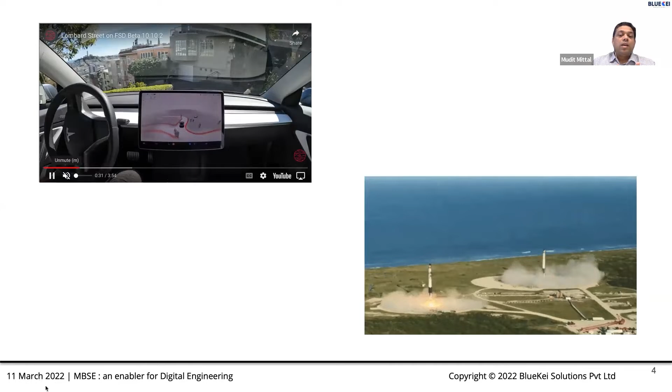So one thing we can simply understand from all of this is how software is becoming a very, very important part of the digital engineering aspect, in the overall product development aspect. This is not just about building software, but also using software to build our products. So it's both of those aspects we are looking at.

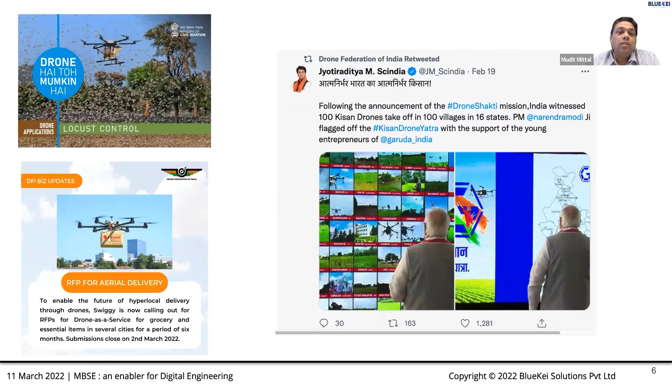Another example is drones, and you might have come across how the government is now supporting drones. The image on the right shows the latest news wherein the Drone Shakti mission has been launched. There are a lot of new technologies and laws enabling small players to become big. The drone industry especially has been driven through startups, coming up with different kinds of applications - agricultural applications, drone-based delivery applications, from small packages to huge consignments across cities. All of this is happening through different engineering aspects.

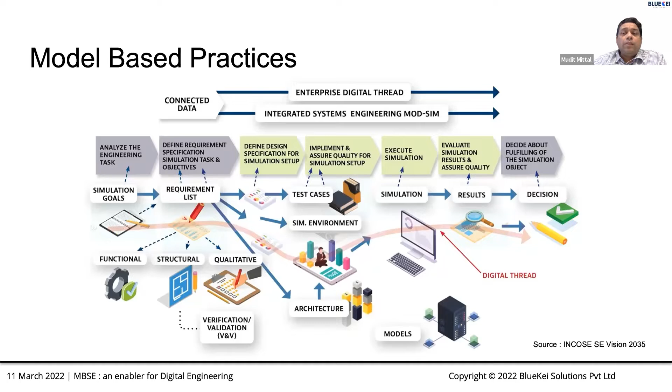This together is enabling your digital thread. And another important aspect to look at is that these models and virtual simulations are helping us achieve two or three primary objectives of any manufacturing organization, which is to reduce time to market.

Also, first time right - what this means is if you are able to validate it thousands of times in the virtual world and fail there fast, but in real life you are actually able to produce it right the first time, you have reduced your overall life cycle, shortened your duration of time to market, saved a lot of cost on errors, and you are ahead of the game with the competition. And that is what is enabling the use of model-based engineering.

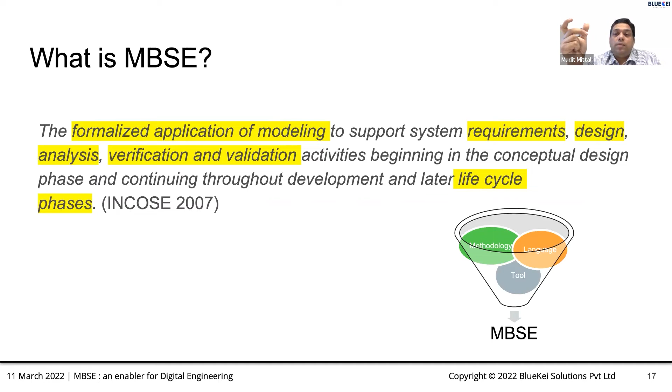One of the core languages, which is very common and has now become a standard, is the SysML language. SysML stands for Systems Modeling Language, and ultimately a language is providing you semantics and notations.

So the idea behind a graphical language is that you are able to denote your concepts of system engineering, your artifacts, such as context diagrams, behavioral models, architecture, requirements, test cases, or parametric analysis, in terms of diagrams which anyone can understand, because they're all using the same common language and notations at the back end. This will help anyone in the world understand, irrespective of which tool you are using. So in a way, SysML becomes tool and methodology agnostic.

Now, the methodology piece is often driven through the organization's culture and their product development process, but also sometimes adopted from the best practices across the industry. So one of the most common ways of looking at methodology is approaching it from a black box and white box perspective.

Wherein you drill down to the problem space, understand what is the mission you're trying to achieve, and then you go down into the solution space. All of this problem space and solution space can be broadly categorized into 4 pillars, which is also the 4 pillars of SysML. You can represent the system engineering artifacts in the form of structure.

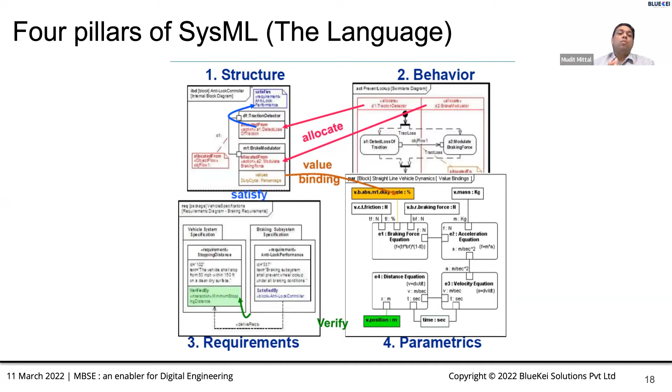And then you have requirements and parametrics. All this together is stitched together and forms a traceability end to end, right from the left side of the V to the right side of the V.

This will actually help you not only in early verification and validation, but also in your certification, because many safety certifications look at the completion or complete coverage of requirements. So at the same time, you're also satisfying all your certification needs.

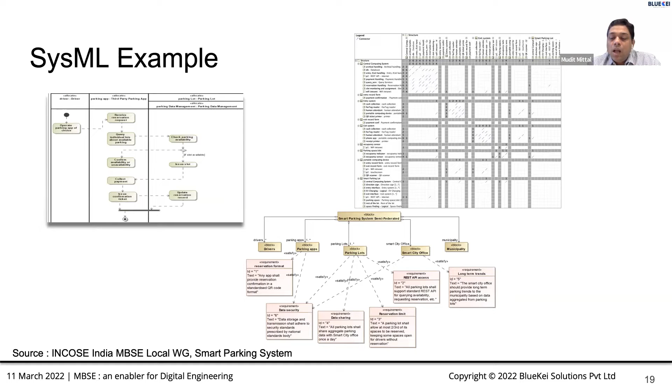If you look at overall, just trying to conclude on the digital engineering aspect, a system engineer actually has to partner with machines. When we talk about machines, we are talking about the enablers of product engineering. For example, your computers, but it is now not only limited to computers, but you're also interacting with test setups, prototypes, immersive visualization. So a lot of new technologies are coming into the game.

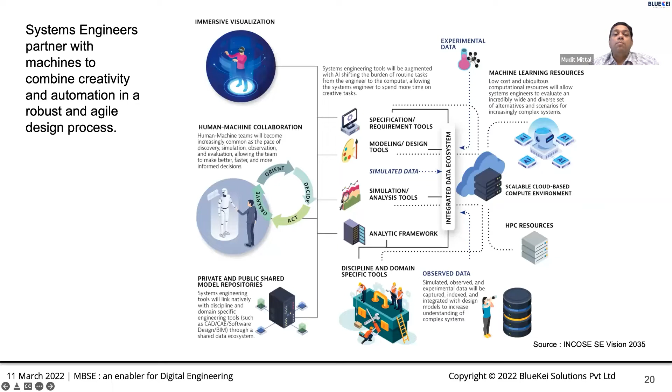You're also looking at machine learning and AI enabling systems engineering. So there's a concept of SE for AI and AI for SE. All of this is coming together. And at the heart, you actually have models and simulations. That is what your MBSE is. And this is how MBSE is tying the world together of digital engineering.

If I quickly summarize what are some advantages of MBSE adoption, one of the biggest use cases for MBSE adoption would be reuse. Once you have done it once, you can easily reuse your models, you can easily reuse your library components for the next project or for your next product cycle.

It reduces errors because in the traditional way, and we have seen many pain points of our customers, they are doing maybe architecture in one tool and design in another tool, and those tools are right now not talking to each other. But slowly, the adoption of MBSE is actually enabling this interoperability, wherein you can take data from one tool and move it to the other tool, and you're able to reduce those errors because all of this is happening automatically, and it's no longer dependent upon just a human brain.

It enables communication. Once you have these views created, it helps you communicate with all the stakeholders. Across the lifecycle, you're able to model from the left side of the V to the right side of the V. And since this is a computer-readable language, a computer-readable model, you can actually do automated reasoning. You can do a lot of algorithms on top of your models that can give you a lot of analytical results. And a lot of research is happening in this field.

Ultimately, what is happening is it is narrowing the risky and expensive gap between describing a design and analyzing it, because again, the tools are interconnected and your design can easily be fed into virtual validation and verification.

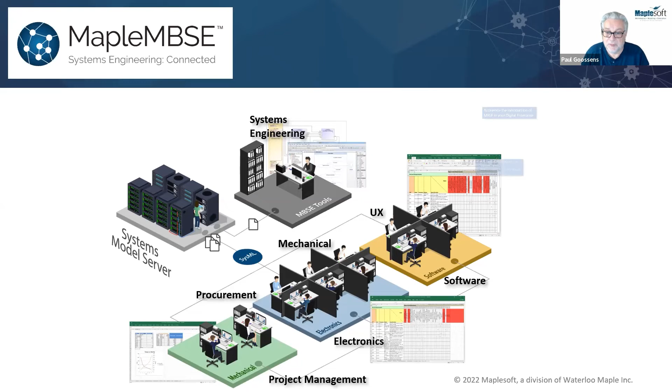Mudit talked about the SysML model, which captures the four pillars of the system definition. But the systems engineer needs information from the various subgroups involved in the design process. Typically, these people are called subject matter experts. They have the knowledge to provide the level of information required for the systems engineer to build a successful systems model. Really, what our tool provides is the ability to help get that information from all the stakeholders in a consistent way.

It also reduces resistance. There's typically resistance by various people to new tools and new processes, because all we're asking the SMEs to do is use Excel to do their work. With Excel at the front end, at the back end we're then converting the information that goes into the Excel front end into the systems model in a consistent way, structured the way the systems engineer requires it.

This isn't just about improving the workflow, the data flow between the SMEs and the systems engineers. It actually means everybody can collaborate much more effectively through the systems engineer, so they can all capture their knowledge, share it, and collaborate between all the stakeholders. So it really does help smooth out the process, and it increases knowledge and makes that knowledge readily shareable.

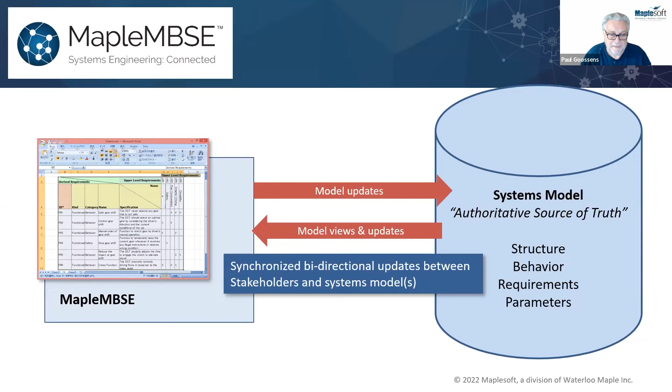So it actually bypasses any need to go through the other systems engineering tools. Everything just happens seamlessly. We're using a familiar interface to allow end users to put their knowledge into the tool. Everybody's comfortable using Excel. As one of our users said, why should we force our end users to use other tools when Excel can actually be used to do that?

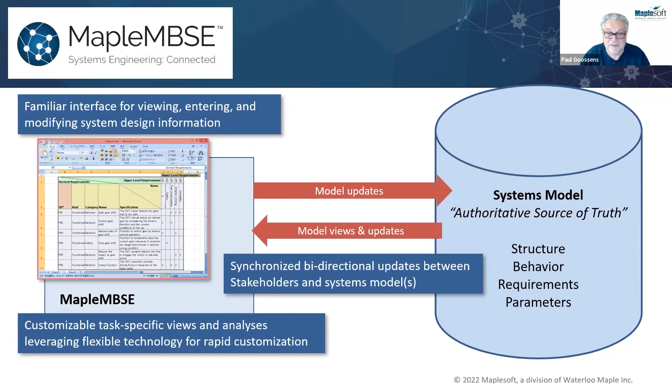Because there are many different tasks and configurations that need to be performed, we provide powerful technology for customizing the front end and back end to do that integration. It's very quick - typically it takes some of our end users between half a day and a day to configure an application using our configuration tools. Currently we integrate with models developed using some of the bigger SE platforms - IBM's Rhapsody, MagicDraw, Cameo through Teamwork Cloud, and recently last year we introduced an integration with Capella.

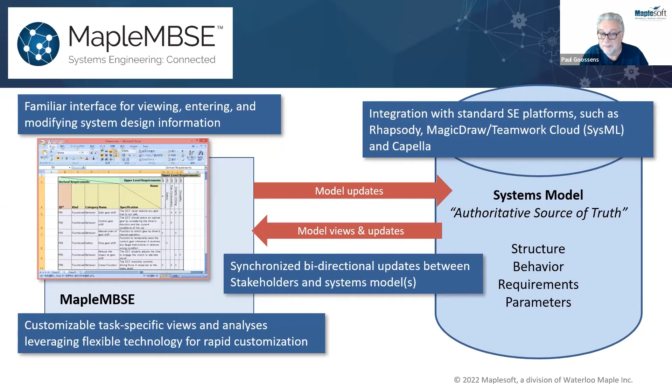Just to give you a sense of what it's good for, these are the typical use cases we get involved in. Really what it comes down to is when you have large amounts of information that needs to be collated, structured, and integrated into the systems model. There is no cultural shock for the end users, they're already in a tool they're comfortable using, so it's a very simple step for them to use our tools to do their work.

Typically this is information required at a certain level of detail that can't be acquired any other way. You need the subject matter expert to provide that level of knowledge and detail needed to create actionable tasks within the systems model. We mentioned functional decomposition as an example, and that's what we're going to show in a moment. We also have systems engineers using the tool to analyze the structure of the systems model, getting a clear tabular view of the system to perform analyses like design structure matrices and traceability analysis. So this gives you a snapshot of the kinds of applications the tool is being used for.

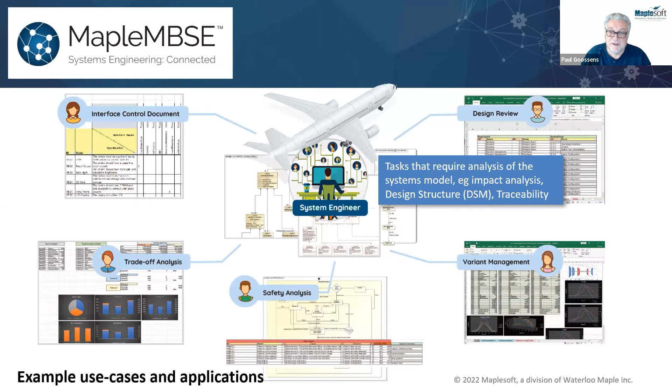So that's just to set the scene. What we're going to show you is Barani and I playing different roles. Barani is going to be the systems engineer, driving Cameo and setting up the model and the view that I will be using as the design engineer to provide detailed functional decomposition that will then be added to the systems model. So while I'm getting myself set up, Barani, if you can share your screen and take people through what we're actually going to be doing.

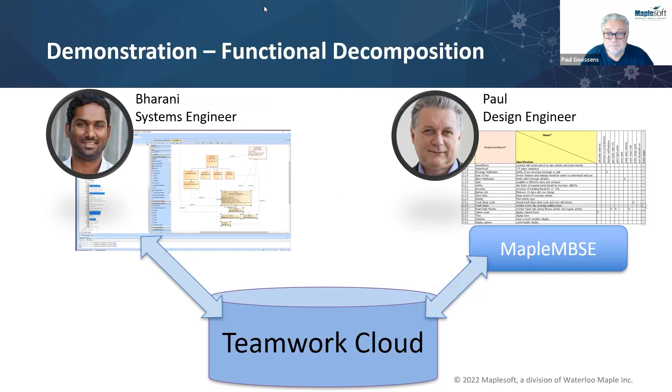Yeah, thanks, boss. Should be able to see my screen now.

So for today's use case with MBSE, we'll see an aspect of functional decomposition. Functional decomposition means you identify the functions you expect your system to do, and how the system has to perform these functions. If you remember from Mudit's V diagram, on the left side you start with some requirements, then define the high-level definition for the system, and then break it down into more detailed information about the system. For this activity, we'll see the behavioral aspect of the system.

As an example, let's consider an activity tracker. The main functions you'd expect are to identify the steps you take, measure heart rate, display notifications, connect data to your phone, and so on.

In terms of functional decomposition, what's expected from a user is to identify functions from a requirement that's already defined. This requirement could come from your technical requirement documents or system requirement document, etc. You identify the key functions, then break down or decompose the function into more lower levels, getting into more detail down to what's called a basic function. A basic function is one you can allocate directly to a certain component, or relate to certain requirements that define the function in a consistent manner.

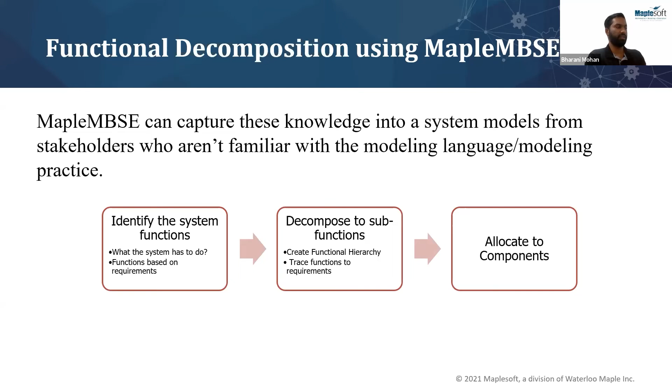So for the functional decomposition with MapleMBSE, we're going to perform the same thing but at a higher level. Paul will identify some system function, then decompose that system function into sublevels, relate it to requirements, allocate it to certain components, and so on. That will be Paul's role. Once Paul makes the changes, he saves his changes to the system model.

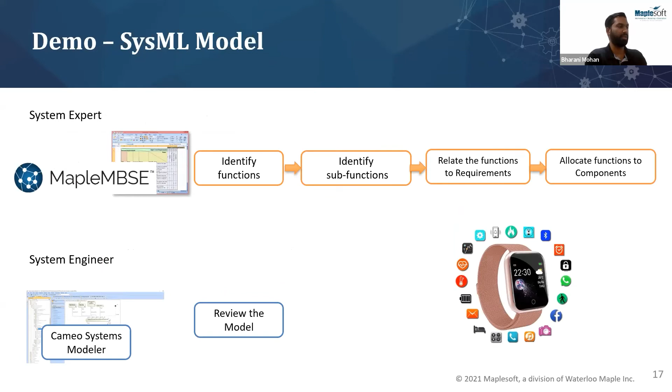I'll be opening it and we will review the model, like what are the new additions that Paul made, and how these information are captured in a structured format. So before I move to Paul, here I have the model open with a modeling tool. This is Cameo Systems Modeler. You can see that I opened the activity tracker. There are already certain functions defined in the model, relations to requirements and so on, as you can see. So I have created a template for Paul to capture his knowledge of the functions for the specific system, which is the activity tracker. He's going to identify the functions, make the relations, and then we'll get back to Cameo to see how he has added the information in a structured format and how we are able to capture it.

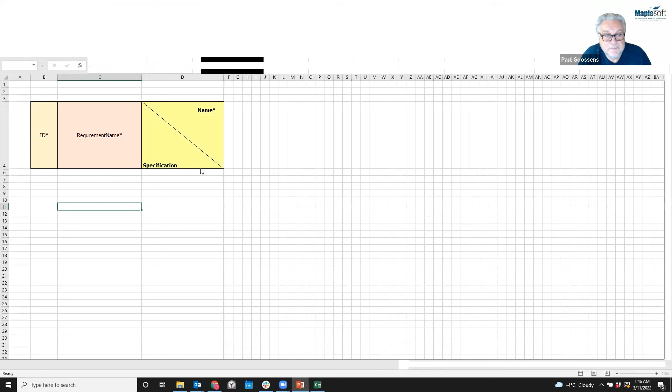Okay, so those of you who are familiar with Teamwork Cloud are probably familiar with the login dialog. So I'm connecting to Teamwork Cloud. It's on a remote server somewhere, so somewhere in the world. And here we can choose whichever model we want to pick up. We're working on the activity tracker, click OK on that. Okay, so now we're loading that model that Bharani just showed you. Takes a little while to come in, and also, as Bharani mentioned, I'm using a configuration and a template that he's developed in order to do this task.

First of all, what we have are 3 tabs which are related to the 3 tasks that Bharani showed in his presentation. So we're going to first of all assign functions to fulfill the requirements that are resident in the model. We're then going to break down those high-level functions into more detailed sub-functions, and then we will allocate those functions to different components within the design. So let's start with the assignment.

So these are already residing in the systems model that Bharani showed. They've already created a view with that information. So what I'm going to do is just add another function here. I'll just put track steps into here, and I'll hit enter. You can see that we now have a new row, new column set up against the rows for the different requirements. So the track steps is going to be the function that's going to fulfill the track steps requirement. So I just simply check that off, and then that relationship is then being applied in the background.

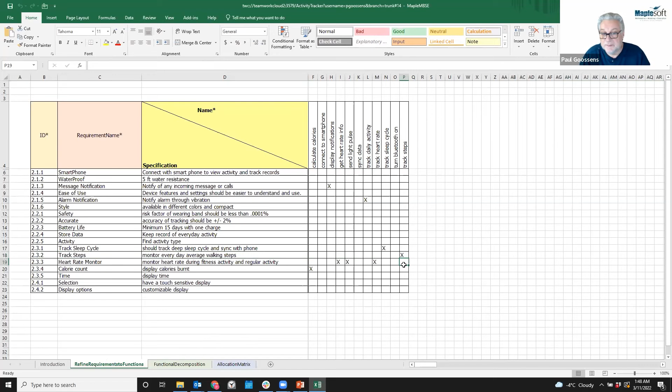So once we've done that, I can now start to decompose that high level function. And again, we already have some functions that are residing in the model. The track steps, that's the one that I've just entered. And you also see that not only do we have a list of the functions, but we also have the hierarchy that these are related to.

So I'm going to build a set of new functions that are sub functions to that track steps. The way I do that is just to create a new row. It's asking me for a task to go in here. So I'm going to start with find, we're going to just use find the altitude. And we'll do a couple more here. So track steps, and we'll find pressure.

And then we can also do the deeper levels of hierarchy. So we could have, let's say, send data to processors... no, it's not, determine activity, sorry. And then we can then say, okay, I want to add to that, send data to processor. Okay, so now I've created these different functions that are all keeping the relationships together. I'm going to put one more in, which is to store the data.

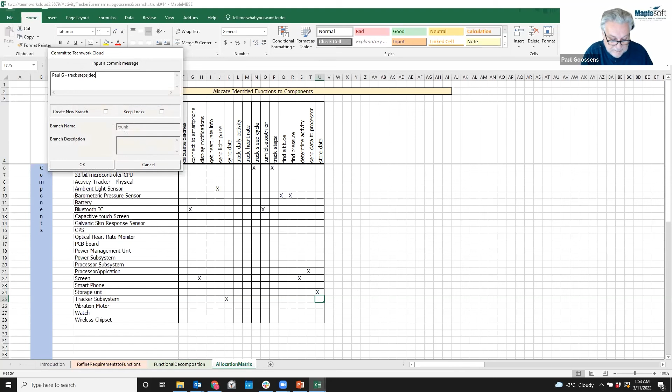So with a few entries in the spreadsheet, I've now created all those relationships. Now I want to submit those changes into the systems model, so I fire up my commit button, and I'll put something in here: track steps decomposition, and hit OK. And those changes are now submitted to the systems model in Teamwork Cloud.

So that should then be back to you, Bharani.

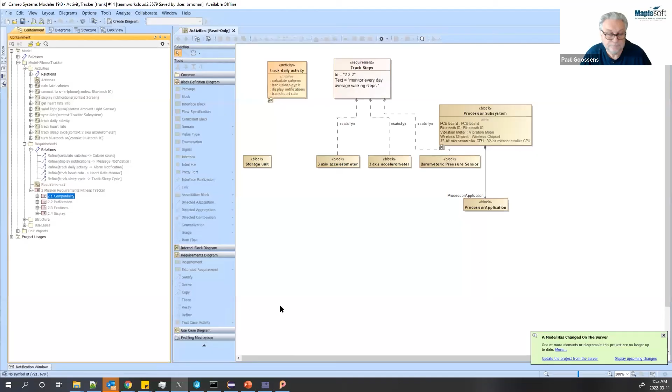Okay, so you can see that I get a notification that the model has been changed, so I'm going to update my project to see the latest changes. You can notice from the list of activities, the new function that Paul added, track steps, is not added to the list yet. So I'm going to update my project so that we get the latest changes.

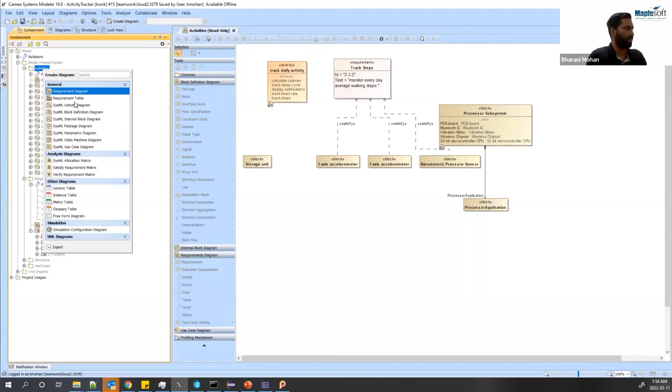So the update is now done. You are able to see a list of new functions that were added, like track steps, find altitude, the pressure, and so on. To make it clear, I'll just create a new diagram so that we can visualize the new content that was added to the model.

So we had the change to the daily activity, then to the steps, pressure, the altitude, then store data and send data to processor. So here you can visualize the top level activity, then determine activities here, then the store data, find altitude, and everything in a proper hierarchy that is needed.

You can also notice that nowhere when Paul made these changes did he mention that this has to go into the activities or the kind of relation that has to be created between the activity and so on. So I've already predetermined the template to define the scope, like where the information should go into the model and what kind of relation should be created.

So he also made the relation between the requirement. So you can see that the track steps, you can trace it back or relate it to the requirement from which this was refined.

And then we also made some allocation to the accelerometer, the pressure sensor, to the processor subsystem application, and so on. So if I just drag and drop the information here, you're able to see the allocation relation.

So these are all the new functions. You can see how the functions are being related to each other, so you can do the complete traceability.

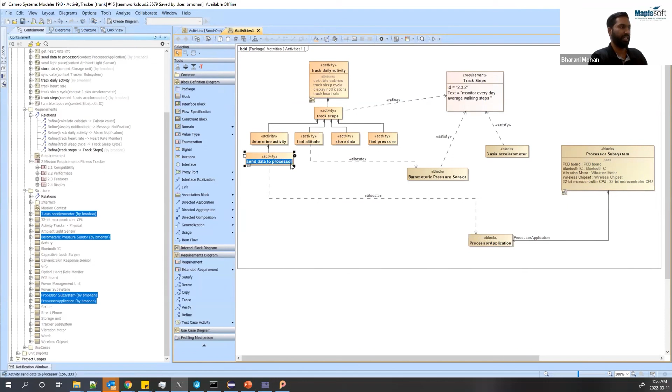So for example, as my review, I find that send data to processor is not right because this is being allocated to the application. So I'm just going to rename this as send data to processor application. And then I'm just going to save my changes back to the server.

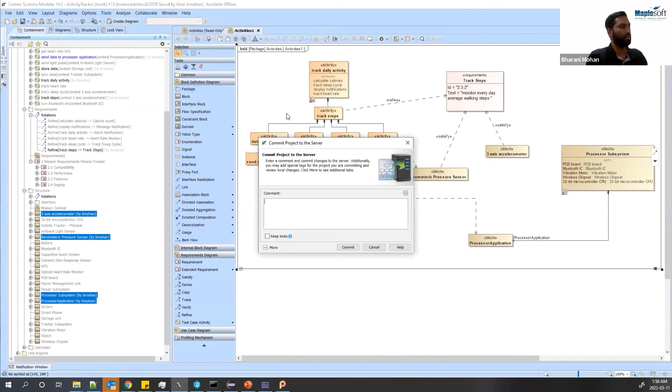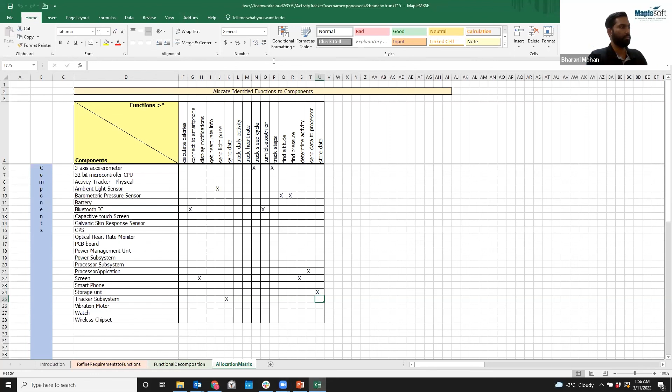Okay, and I'll just share my side. So, add-ins. You submitted now? Yeah, so you can go into one. Okay, so now I'll just reload.

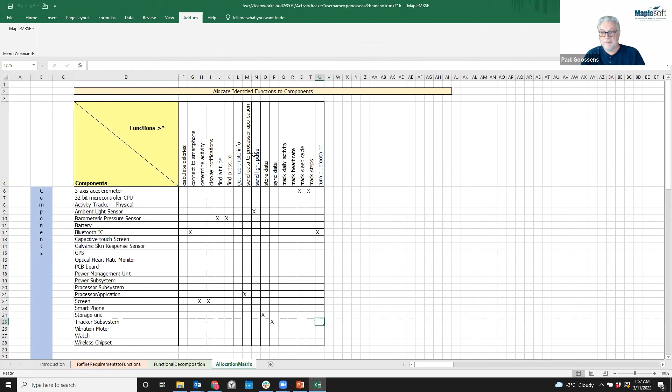Okay, now we can see the change that's reflected in here, so everything is seamlessly integrated into the workflow. And I've noticed we're running a little short of time, so I think we'll cut it short there.